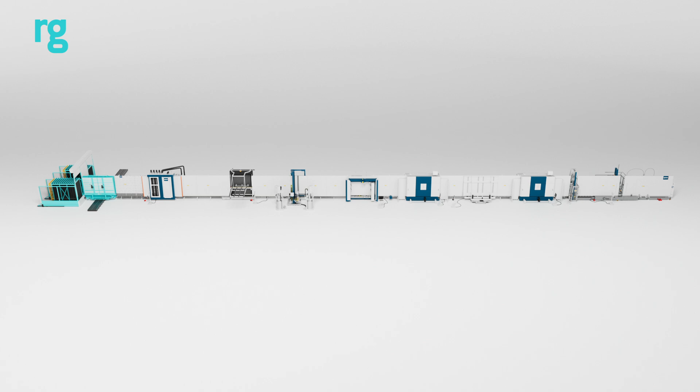In this video, we'll explain how we make our Regency Triple, featuring Corning Enlighten Glass. Ultra-thin glass triple-glazed units are manufactured on the new Glaston ULTRA Thin TPS production lines. Unlike other production lines at Regency Glass, this advanced line is fully automated, helping to deliver the precision and efficiency at every stage that our customers rely on.

The ultra-thin glass TGU is made up of 3 pieces of glass: 2 outer panes, 1 Corning Enlighten Glass center pane, and 2 TPS spacer bars.

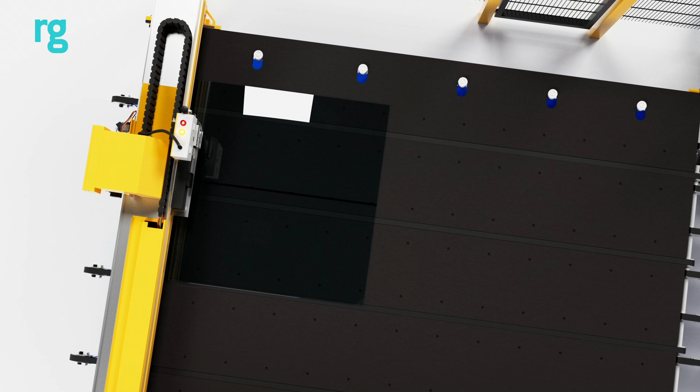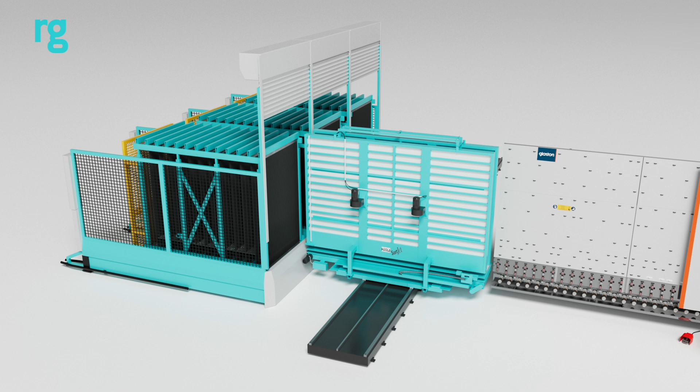Making an ultra-thin glass TGU begins with the glass being cut to size, then brought over to the production line in specialist designed compartment carts. Glass is auto-loaded by our Hegla SortJet onto the line, with the Corning Enlighten Glass going on first, followed by the 2 outer panes.

The first stage of the production line is the glass infeed, where each pane is washed and dried. Rotating brushes clean both sides, followed by air nozzles that dry the glass.

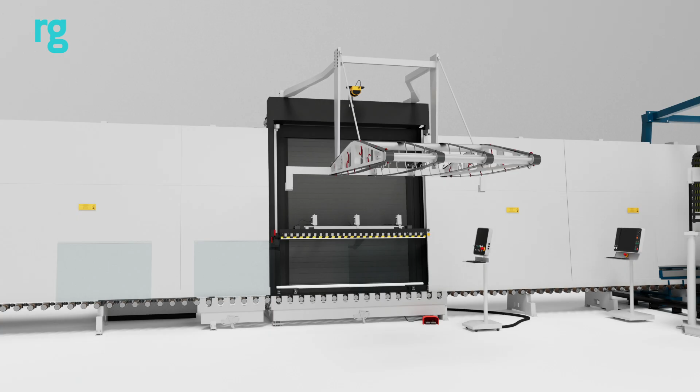Each pane of glass then moves along to the inspection area, where glass is inspected for any imperfections, ensuring we maintain the highest quality.

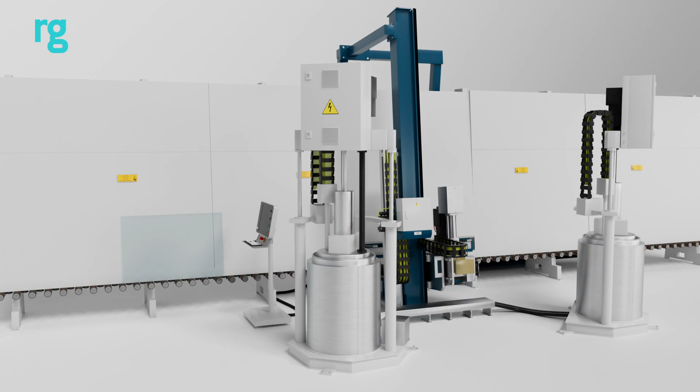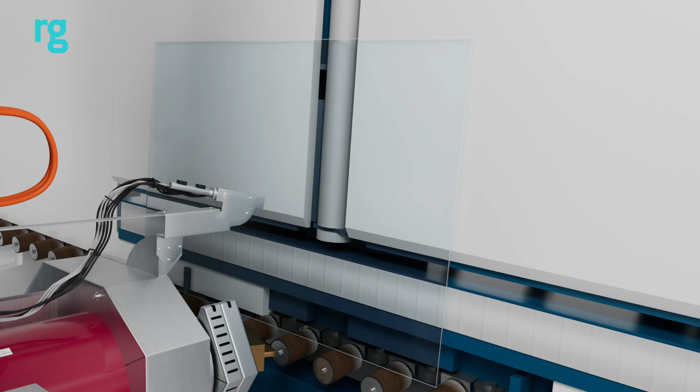After the glass has passed inspection, it arrives at the TPS station. The Corning Enlighten Glass will not have TPS directly applied to it, and will continue to travel down the line, whilst the 2 outer panes will have TPS spacer bar applied to them using the Glaston TPS applicator.

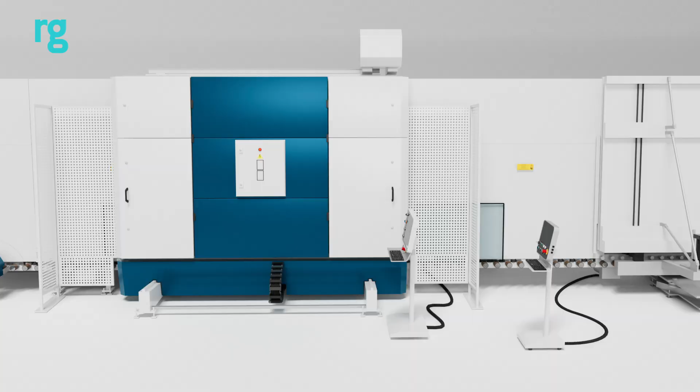The Corning Enlighten Glass center pane and the first outer pane will enter gas press 1, where the first cavity will be argon gas filled. The 2 pieces of glass, 1 outer pane and the Corning Enlighten Glass, will then be pressed together and leave gas press 1. This is where the innovative technology of the ultra-thin glass TGU production line comes into play.

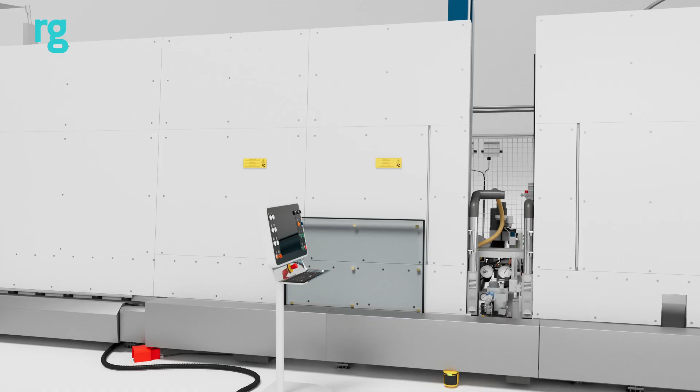As the glass moves along the line, the system automatically rotates it, positioning the Corning Enlighten Glass correctly for the next stage. All 3 panels of glass will then enter gas press 2 and come together as one ultra-thin glass TGU. Finally, the unit will be sealed by the automated sealing robot, and the ultra-thin glass triple unit will be complete.

And that's how our Regency Triple, featuring Corning Enlighten Glass units, are made, using advanced automation to ensure precision, quality and efficiency at every step. With the Glaston ULTRA Thin TPS line, Regency Glass is proud to lead the way in advanced glazing technology.